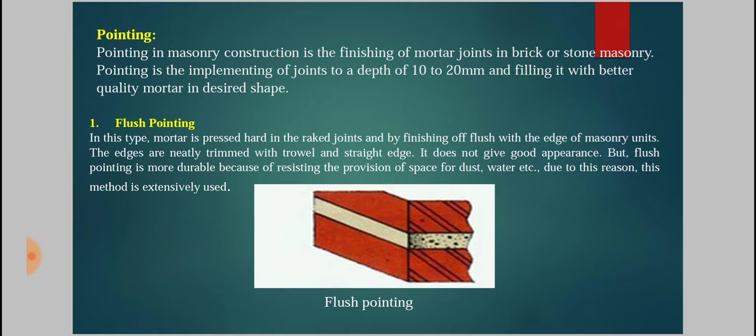That means the bare brick wall surface is not exposed to atmospheric conditions, and it should be covered by the plastering surface. So before plastering, the pointing should be done, and this pointing is known as flush pointing, popularly used nowadays in construction fields.

Second is recess pointing. In this type of pointing, mortar is just pressed back by 5 mm for very good appearance by using some suitable tools. The mortar is pressed backward into the wall up to a depth of 5 mm. You can see the recess pointing figure given. The depth of this mortar pressed backward is 5 mm approximately.

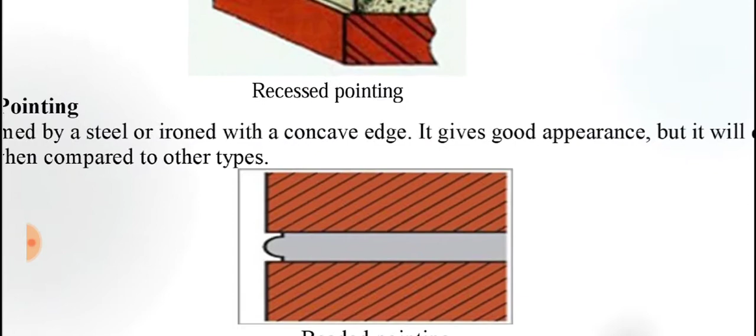This gives good appearance. Beaded pointing, you can see the beaded pointing figure here. It is formed by a steel or iron tool with a concave edge. You can see a curved surface is formed with the help of a suitable tool. It gives good appearance, but it will damage easily when compared to the other types of pointing.

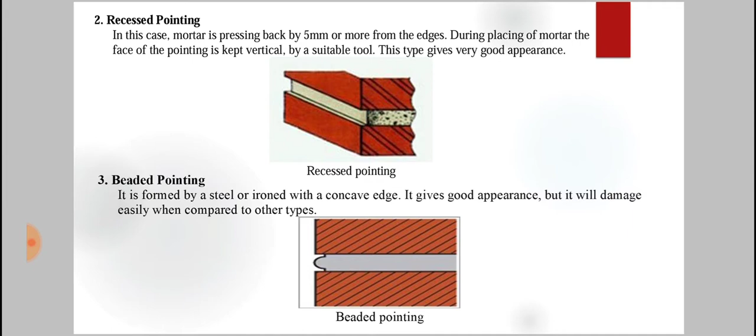Next one is struck pointing. The struck pointing figure is given. It's just a modification of flush pointing in which the face of pointing is kept inclined. You can see the face of pointing is inclined to the horizontal surface. So the vertical surface of your pointing is inclined to the horizontal brick surface.

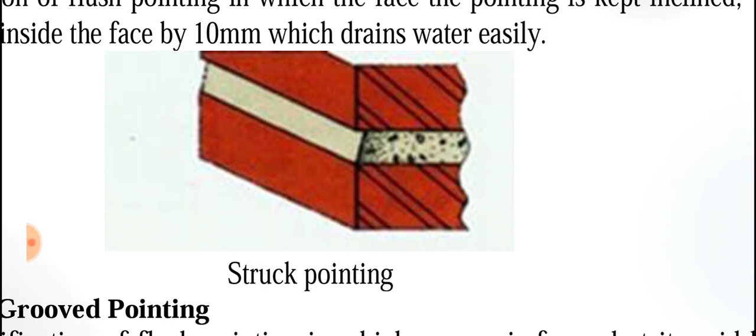So this type of pointing helps to pass the rainwater. Its upper edge is pressed inside the face by 10 mm, which drains the water easily.

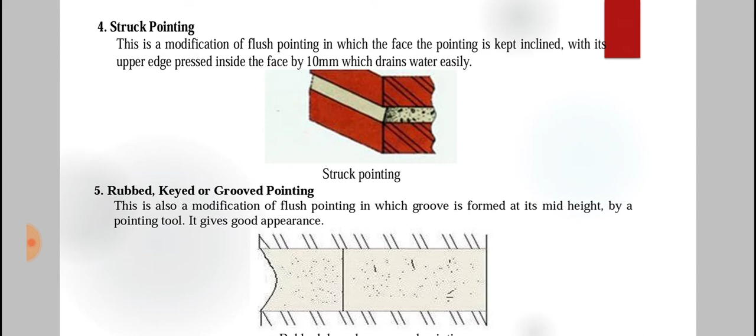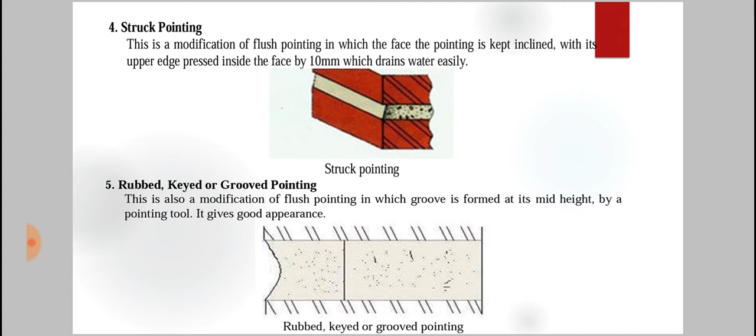Next one is rubbed, keyed or grooved pointing. In this pointing, a concave surface is formed at the face of the pointing. This is also a modification of flush pointing, in which a groove is formed at the mid height by a pointing tool. It gives a good appearance.

Next one is tuck pointing. In case of tuck pointing, a squared groove is formed on the pointing surface. Mortar is pressed in the raked joint first and finished flush with the face. While the pressed mortar is green, a groove or narrow channel is cut in the center, having 5 mm width and 3 mm depth.

This groove is filled with white cement putty. That means the groove of 5 mm width and 3 mm depth is filled with white putty and kept projecting beyond the face of the joint by 3 mm. If the projection is done in mortar, it is called bastard pointing or half tuck pointing.

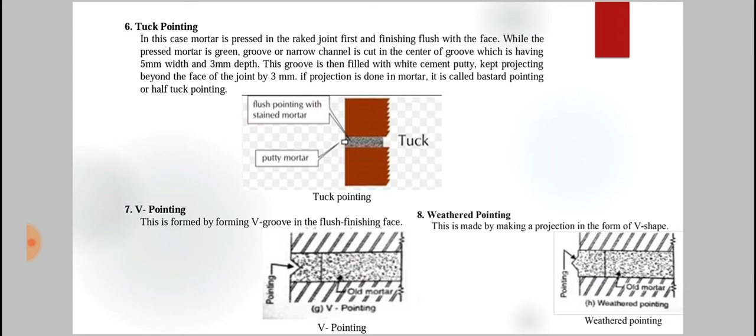That means a rectangular groove of depth 3 and width 5 mm is formed. In this groove white cement putty is filled. So ultimately you can imagine that this will create a good appearance on the face of the wall.

Next one is V pointing. You can see the V pointing figure here. In this figure you can see in the mortar joint between two bricks a V-shaped groove is formed. As per the shape, it is known as a V-shaped groove.

This is formed by forming a V groove in the flush pointing face. It is a simple flush pointing, and we just create a V-shaped groove here. So this is known as V pointing. These are ornamental aspects of pointing.

Next one is weathered pointing. Flush pointing is just a plain finishing surface provided to the brick surface. But in case of weathered pointing, a triangular projection, which faces outward from the brick surface, is formed. This is known as weathered pointing.

You can see here it is written. This is made by making a projection in the form of a V shape. On the surface of the pointing, a V-shaped projection is formed, which is away from the brick wall.

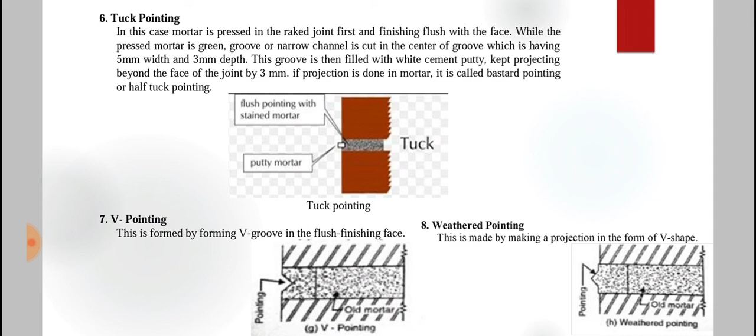On the face of the brick wall, it provides a good appearance and also a protective measure from environmental conditions. That means it protects the mortar joint from external environmental agencies such as rainwater and other agencies. Okay, thank you.